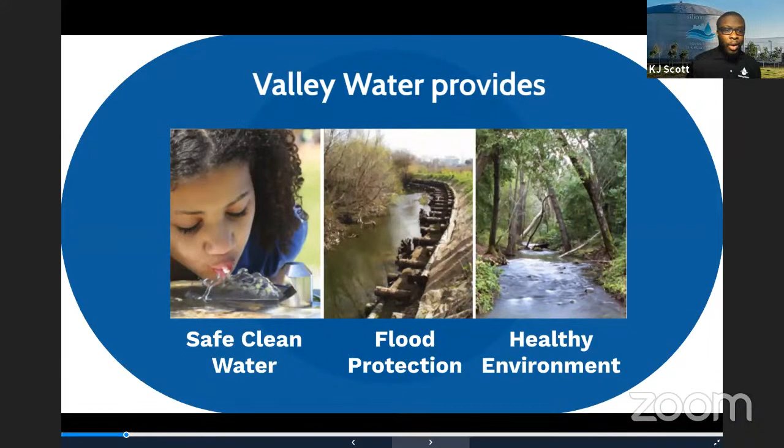So who do we serve? Valley Water is governed by a 7-member board of directors. We serve nearly 2 million residents in 15 cities, and we have about 4,700 direct well owners. The water district is a wholesale water provider.

What that means is the water you receive at your house indirectly comes from us. It comes from one of the retailers, of which there are 13 local water providers that we distribute water to. One of those retailers is responsible for the water coming through your pipes at home. These 13 local water providers use the groundwater basins along with other sources to deliver drinking water to homes and businesses within the county.

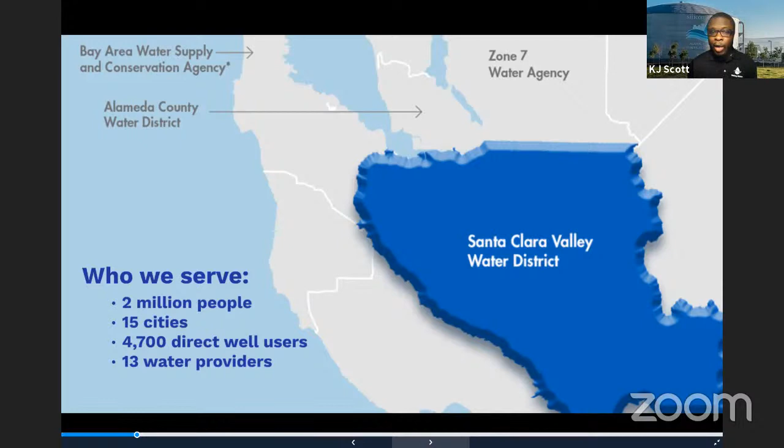Here is Santa Clara County's comprehensive water system map. In the South Bay, we have 10 reservoirs that we pull water from and 4 water treatment plants. If you want to learn about all of the water treatment plants and other things Valley Water has to offer, please take our water infrastructure tour series. We'll drop a link later in the presentation so you can learn more about the other 3 water treatment plants that we're not discussing today, which all deal with our drinking water system.

The fourth and final water treatment plant you'll learn about today is the Silicon Valley Advanced Water Purification Center, indicated there in purple. If you ever see that shade of purple on a pipe or sign anywhere in the community, know that recycled water is flowing through those pipes. You'll learn about that today, and I promise you'll start noticing more purple around your communities from now on.

On this map, the red lines represent imported water from the Hetch Hetchy Reservoir. The orange pipes represent imported water coming from state and federal water projects through the Delta Conveyance System. The green pipes represent water being treated and brought out to the retailers. I also like to mention there are 10 reservoirs from which we pull water.

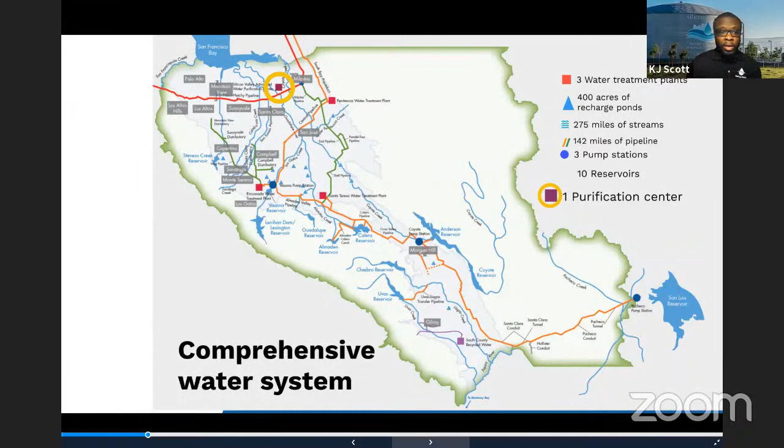All right, remember what I said earlier. You will not be the only ones asking the questions today. We're also going to ask questions. So speaking of which, we have our first poll question for you all.

The first question is, how much of our water supply do you think is local? Out of all of Santa Clara County's water supply, how much of it do you think comes from a local source or by local means?

Do not worry about having the wrong answer, this is all for educational purposes. We are here to learn, to take in, and hopefully by the end of this presentation you all will become water ambassadors, if you're not already, to help spread the word about not only recycled water, but also purified water and the plans that we have for purified water moving forward.

Okay, I see your answers coming. Oh, everybody, oh, not quite. I see some more people haven't answered yet. Got to turn in your quiz scores. What's going on? Blanca will give me the countdown soon. You don't want to turn in your homework late, there are repercussions for that.

And we're closing in 4, 3, 2, and 1. All right, Blanca is now going to go ahead and provide the answer for you all. Thank you, KJ.

So most of you said 30%, and that is actually correct. What you're seeing in front of you right now is the typical breakdown of our water supply in a typical normal year. As I mentioned before, we are in an extreme drought, so our current water portfolio is anything but typical.

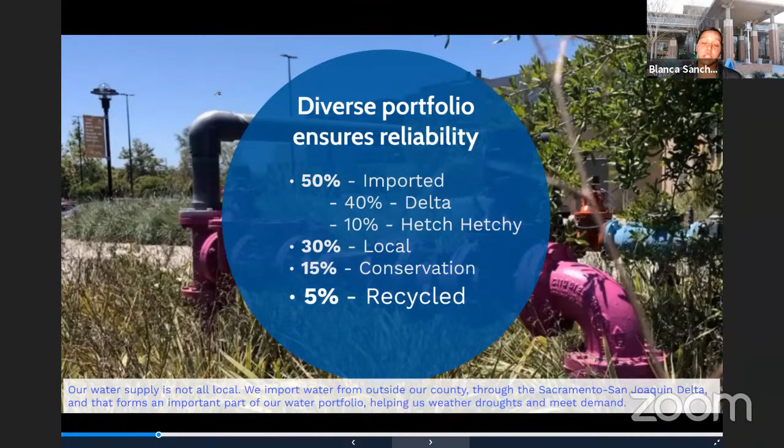Now, Valley Water has done a good job at building this diverse portfolio. For example, right now we're in a drought, and the imported sources are not as plentiful. We can shift and tap into different sources so we can continue to meet our needs. However, there are still a number of risks that we have to continue to face.

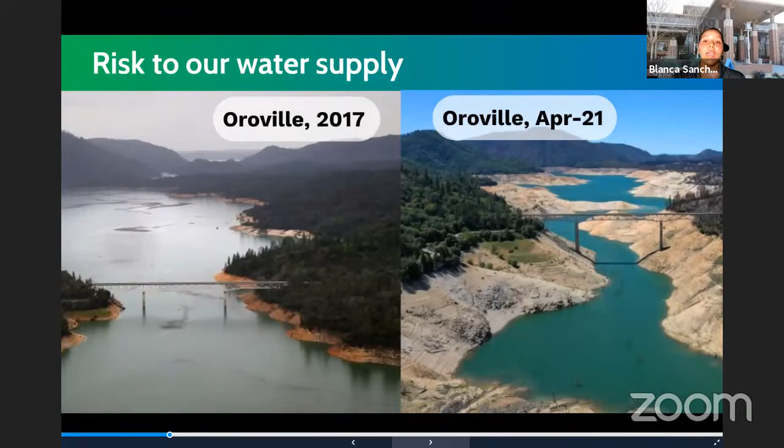One of them, and very real to us right now, is drought and climate change. This is one of those imported sources we were talking about - Lake Oroville, the largest reservoir in the state of California. It's an important water source, not just for us, but for the entire state. You can see here the water levels between 2017, which was a year we had a lot of rain, and April of this year.

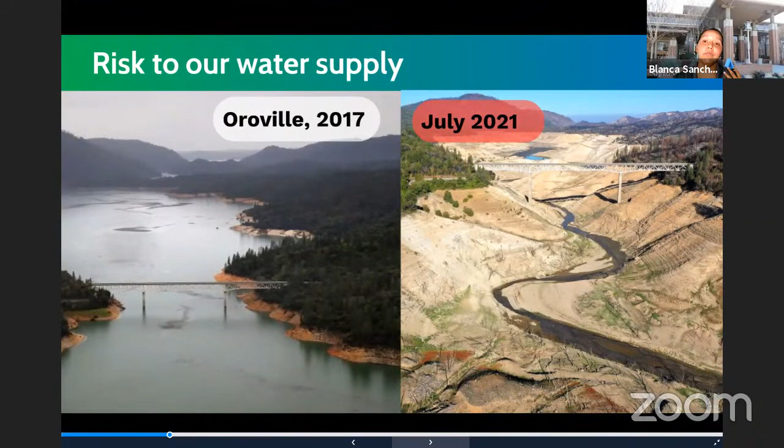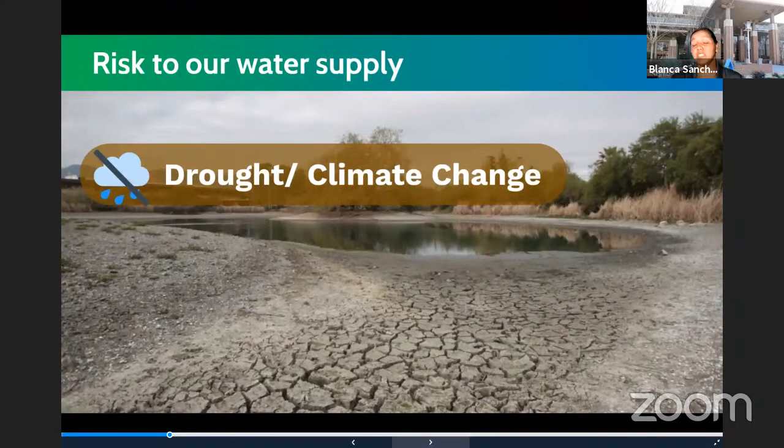Now we actually have an updated photo. This is what it looked like as of July 2021. You may have heard in the news that a lot of our state reservoirs are very, very depleted, reaching historic lows. Drought and climate change is very real. It's not going away. It's part of the California reality. We have to be better equipped and suited to make sure we can continue to meet the needs of our communities, even in times of drought. This can also have negative impacts on our water supply, but population growth is another thing we have to contend with.

Our water supply is not growing. As a matter of fact, it could be argued that it's actually decreasing because of climate change and drought and things along those lines. But our population is growing. So we have more people that need that water supply, and we're trying to meet their needs with what is, in essence, a finite supply.

And finally, the aging infrastructure. Most of our infrastructure that KJ was talking about, our reservoirs, most of them were built in the 30s and 50s. They need to be retrofitted to make sure they can continue to meet our growing water demand and the infrastructure needed to support that water system. So aging infrastructure is an ongoing challenge for Valley Water that needs to be contended with on a yearly basis, year round.

So in terms of what we're doing to keep our infrastructure up to date, one of the projects you may have heard about is the Anderson Seismic Retrofit Project. Anderson is actually the largest reservoir in the Valley Water system. The fact that it's down is significant, and the fact that it's down during the drought is even more significant, because we've had to empty out Anderson due to an order from the Federal Energy Regulatory Commission, asking us to empty it out because of concerns with the seismic stability of the dam itself.

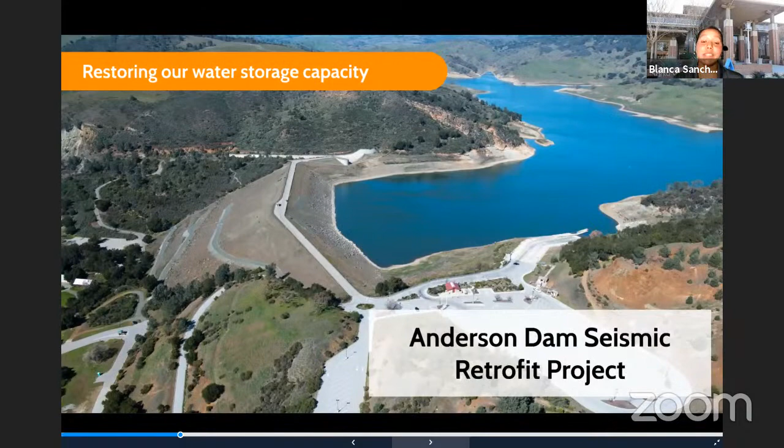So we are in the process of retrofitting, which will actually require completely tearing down the dam and rebuilding it to make sure it's seismically sound and that we can maximize the storage capacity of this reservoir, operating it while making sure we're not bringing undue risk to the community. But during a time of drought, that's about 50% of our surface storage capacity that is currently out of commission, which is a significant loss.

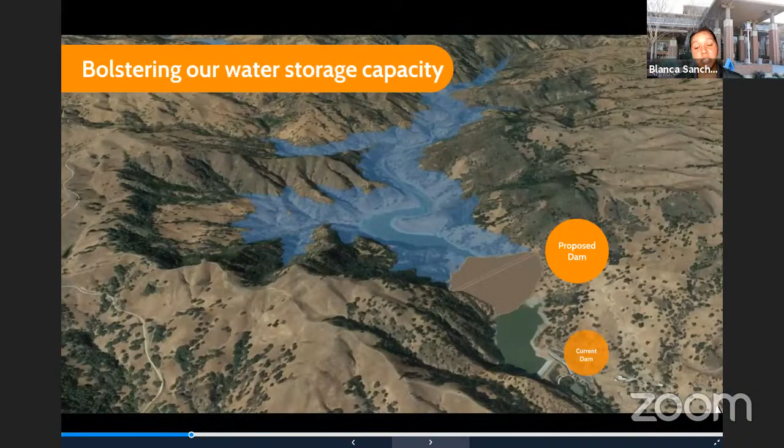The other thing we're exploring is actually increasing and bolstering that surface storage capacity. One of the projects Valley Water is currently considering is an expansion of the Pacheco Reservoir. Pacheco Reservoir is a relatively small reservoir on the boundary between San Benito and Santa Clara County. It currently only holds about 5,500 acre feet - that's the capacity, enough water for about 55,000 people for a year.

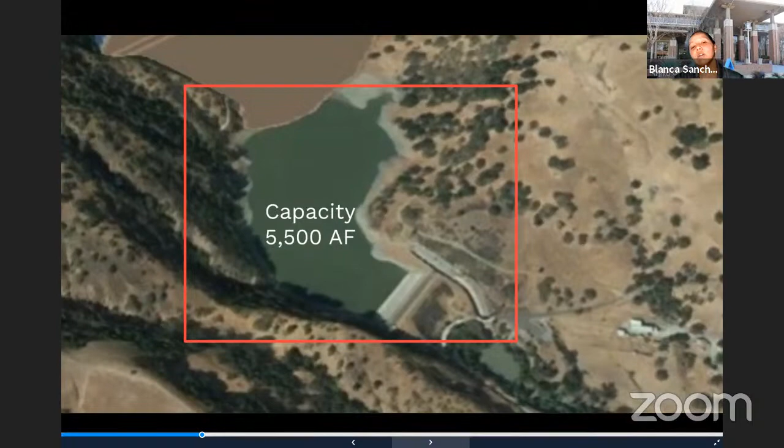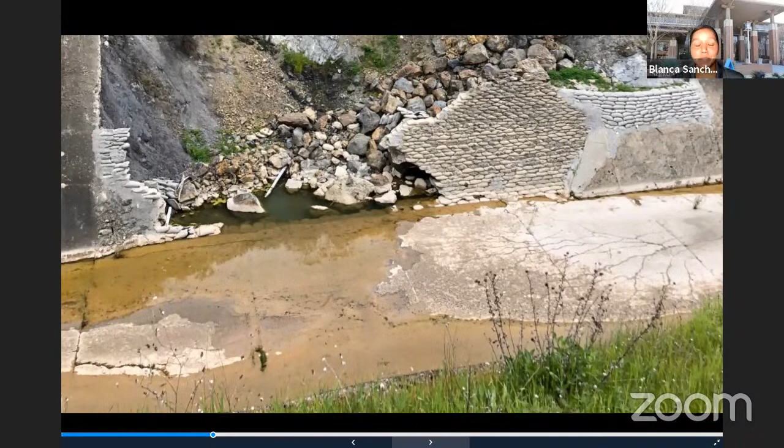The expansion project - the actual current reservoir is pretty in disrepair, definitely needs a lot of fixing and patching up, as you can see in this picture. The proposed project would actually build a brand new dam at the same location that would increase the capacity of this facility to 140,000 acre feet. That would be enough water to supply 1.4 million people for an entire year in the event of an emergency.

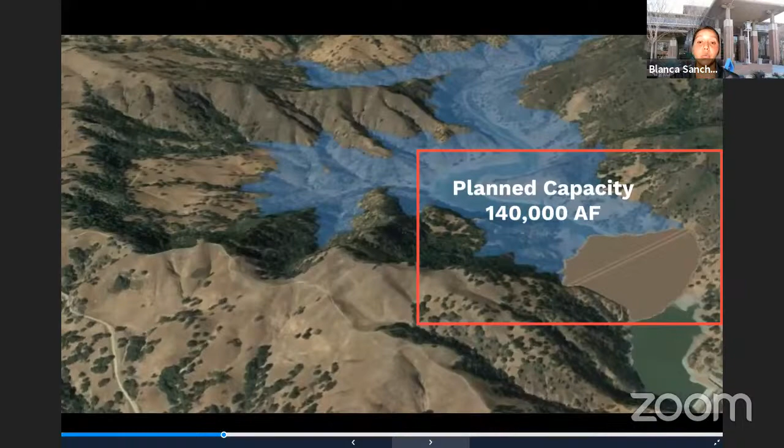In an emergency, we're talking about, for example, the current emergency we're facing right now in terms of drought, where that imported water is not available. If there were any disruptions to the conveyance system for that imported water during a typical year, this would be one way we could supplement the loss of another water supply through one that we have here locally and manage locally.

All right, so that gives you a quick overview of Valley Water, and now we're going to dive deeper into this water reuse and advanced water purification. So I'm going to pass it on to KJ as we head on over to the regional wastewater facility.

So let's talk a little bit about the Regional Wastewater Facility so you understand the significance for this presentation. The San Jose, Santa Clara Regional Wastewater Facility is the supplier of the water that goes to the Purification Center. This facility treats up to an average of 110 million gallons per day of wastewater.

Wastewater is any water going down the drain within your home - a sink, your bathtub, your washing machine, your dishwashing unit, your toilet, etc. So any drain within your home. As soon as it goes down the drain and into the pipes, it's going to the regional wastewater facility.

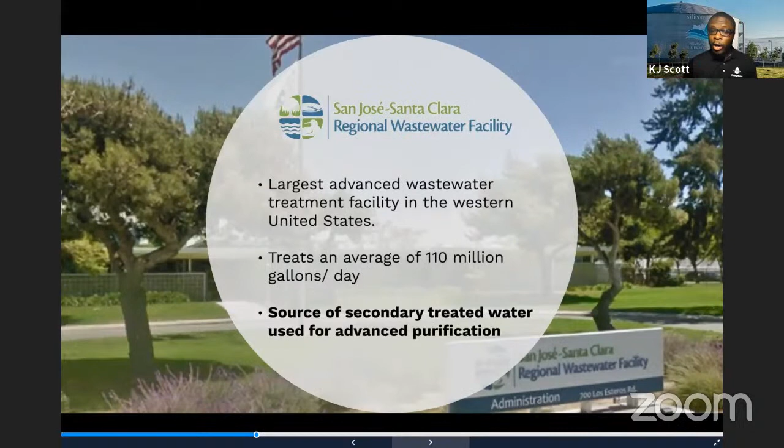So we are at this secondary treated water phase, and we have some graphs here to show you very soon. But before we do, I have to make sure you all are familiar with the water cycle, because the water cycle is essentially what the Purification Center can help speed up.

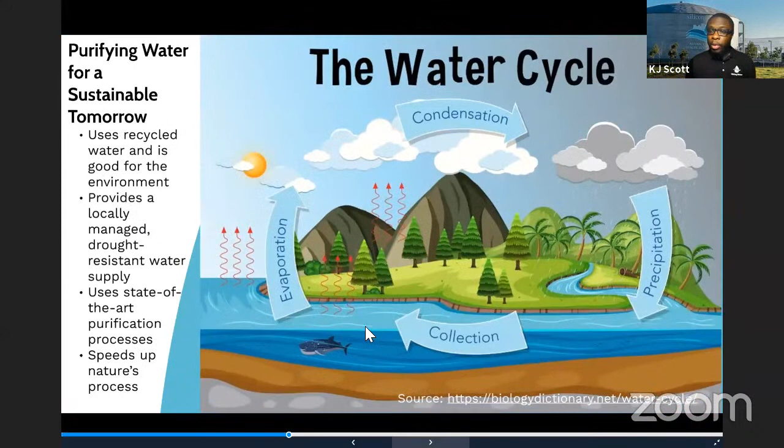The water cycle is a built-in, Earth-made system in which Earth naturally replenishes water on its own. So ocean water or whatever water is out and about can get evaporated, goes into the sky. We see it as clouds, it condenses, then eventually comes down as rain, precipitation, and it does it all over again. So all the water here on Earth has been used forever.

Now, the only issue with the water cycle, if there is an issue, is that sometimes this can take a long time. If you're a small water molecule at the very bottom of the ocean, there could be years, centuries before you're even evaporated again up into the sky. Well, we have so many residents in Santa Clara County, we may not have that time - we don't have decades and centuries before we can use that water again.

So if there's a way that we can turn over this wastewater that we create every day in a timely fashion, then we can create an essential system for ourselves in order to bolster our local water supply so that we do not have to rely on so much imported water, especially in a drought which we are currently in. The Purification Center is simply a model to speed up Earth's natural process of recycling water in purified form.

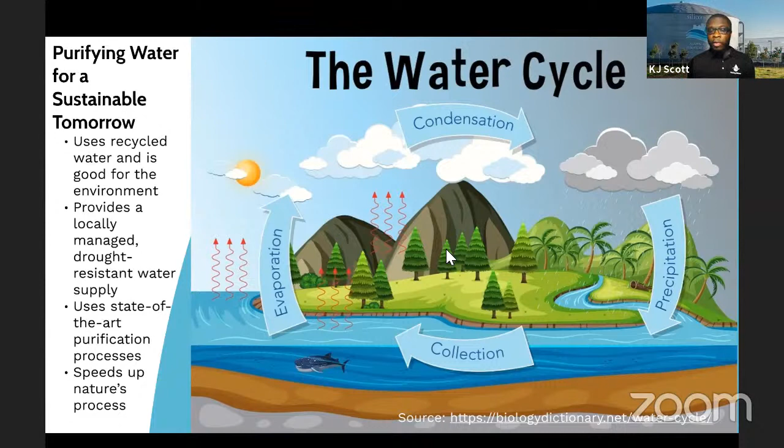So when the water leaves your home and goes to the regional wastewater facility, the facility will initially take out all of the large objects out of the water, all the suspended solids we can see with our naked eye, and remove those objects from the water. Once that water is now considered secondary treated water, a portion of this water is sent to the Purification Center for purification.

At that point, the Purification Center's job is to remove all of the dissolved solids out of the water that we cannot see. These are microscopic solids.

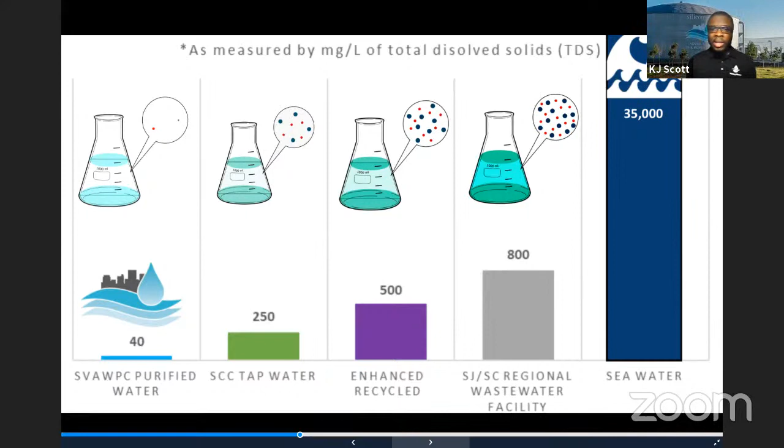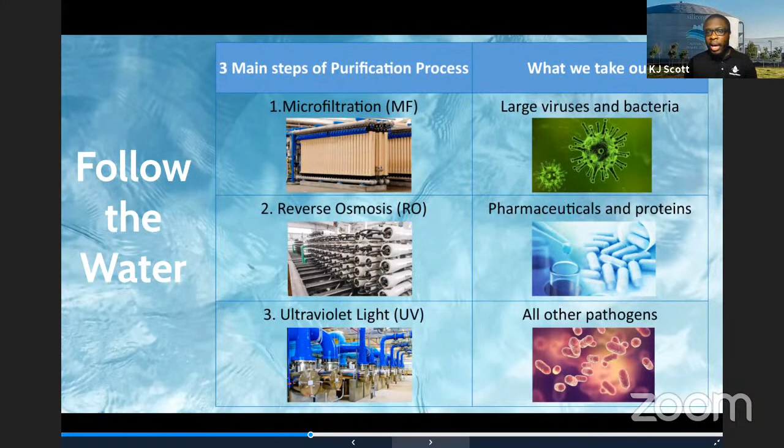Moving forward, these are our three main processes that the Purification Center uses: microfiltration, reverse osmosis, and ultraviolet light disinfection. On the right-hand side, you see the contaminants that are generally taken out at each one of these steps. We're going to talk about these in more length very shortly.

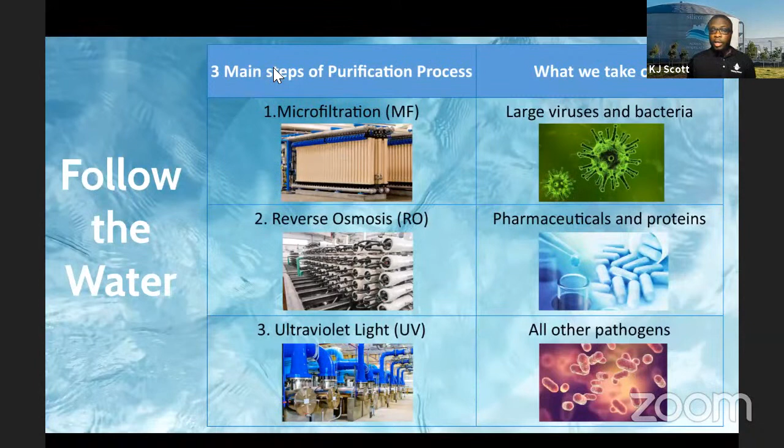So right now, what are we doing with this water? As I said earlier, we're just using this purified water to blend with our already recycled water system. By doing that, we are creating an enhanced recycled water solution at 500 TDS, used for industrial, landscaping, and agricultural purposes. So as you can see there, the water leaves your home.

It's either going to go to the Purification Center or remain at the regional wastewater facility. A portion of that will blend together and be sent off for recycled water purposes. In the future, we're going to talk about that later on at the end of the tour, what we want to do with this water once it leaves the Purification Center to help bolster our local water supply.

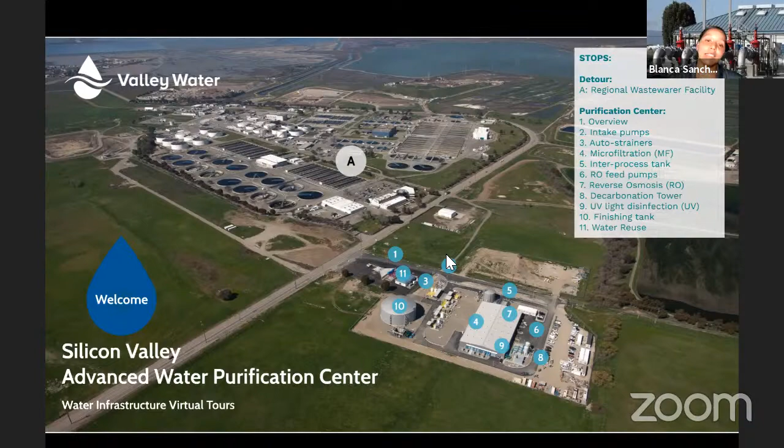We're going to start at station number 2, the intake pumps. The secondary treated water we receive undergoes about 10 hours of treatment before it comes to us. Before we subject this water to advanced purification, we pre-treat it at this facility. There are 3 things that need to happen before we can start advanced purification: the water needs to be pressurized, disinfected, and strained.

What you're seeing in front of you right now are our 4 intake pumps. Their sole job is to pressurize the water. The water comes to the facility and flows via gravity through about a quarter mile pipeline, so by the time it gets to us, there's no pressure, no energy in that water. These pumps help us increase the pressure of the water to 40 PSI, or 40 pounds per square inch. We're pressurizing the water so we can push it through the treatment processes.

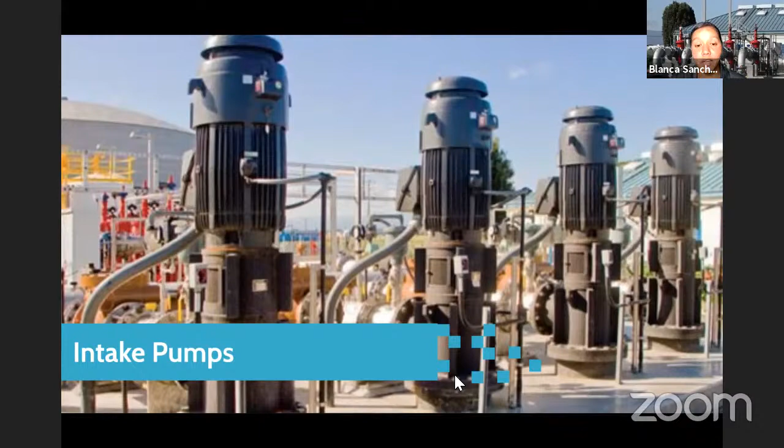After the water has been pressurized, as it makes its way to the next station, the auto strainers, we add disinfectants to the water. We do that to help control for any biogrowth in the water as it moves through the treatment processes. So after it's been pressurized, we've added chloramines to disinfect it.

Now it's time to strain it. The water we receive is about river quality water, so there are still some very, very small suspended solids in the water that you can kind of see with your naked eye. So the water looks a little bit murky.

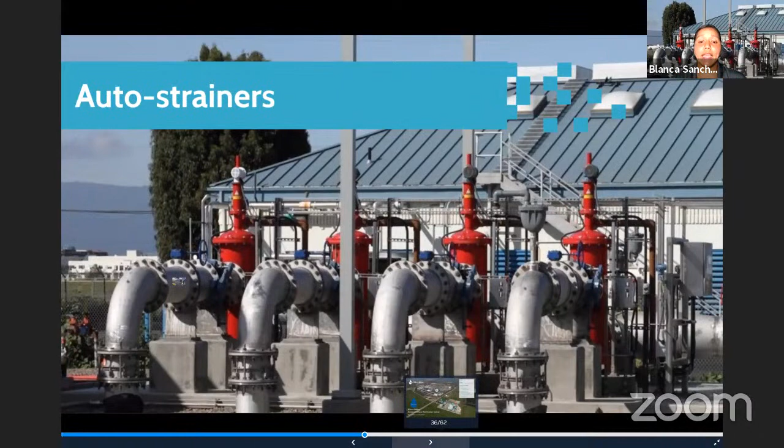The water passes through these 4 auto strainers. Inside each one is a stainless steel cylinder with openings about 300 microns in size. So any suspended solid in the water that is 300 microns or larger will get caught inside this strainer. For comparison, 300 microns is about the width of a human hair.

The auto strained water then flows out through the walls of the cylinder—it flows in through the middle and pushes outward. That water then moves on to advanced purification. All of the contaminants that get removed and stuck inside the cylinder are vacuumed out. There's a rotating nozzle inside the cylinder that rotates about every 30 to 40 minutes and suctions out all of those contaminants. Those contaminants are then sent back to the regional wastewater facility for reprocessing.

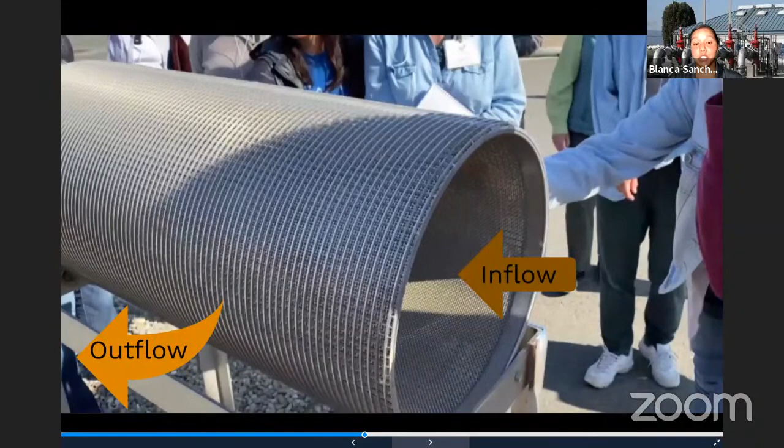The auto strained water then moves on and starts the advanced purification process with the first step. So once again, we started with pressure, disinfected, strained that water, and now we're going to move inside our facility to the first step, which is microfiltration.

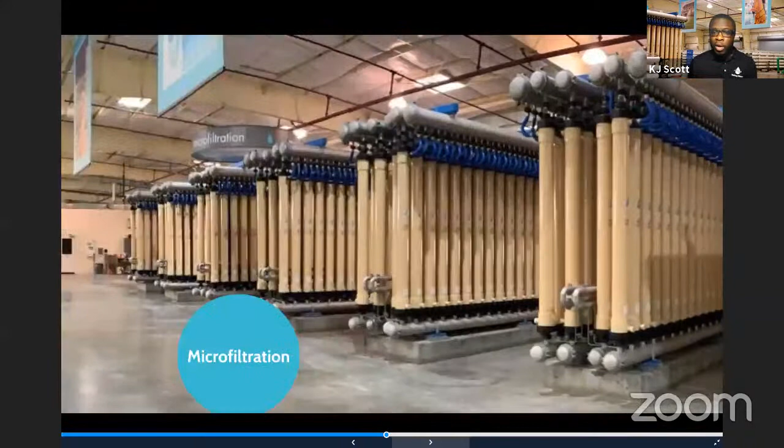All right, so here's an inside look of the facility. On the right-hand side, we have microfiltration, which we're going to talk about next. On the left-hand side is reverse osmosis. And in the very back, we have the ultraviolet light disinfection reactors.

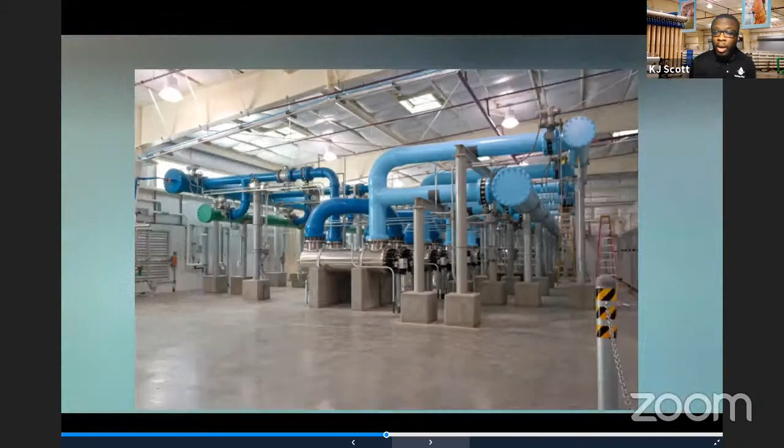All right, so the next thing we're going to do is play a short video for you all about microfiltration, and then we're going to talk about it. A link will be posted in the chat for those having trouble viewing. You can view it after the tour.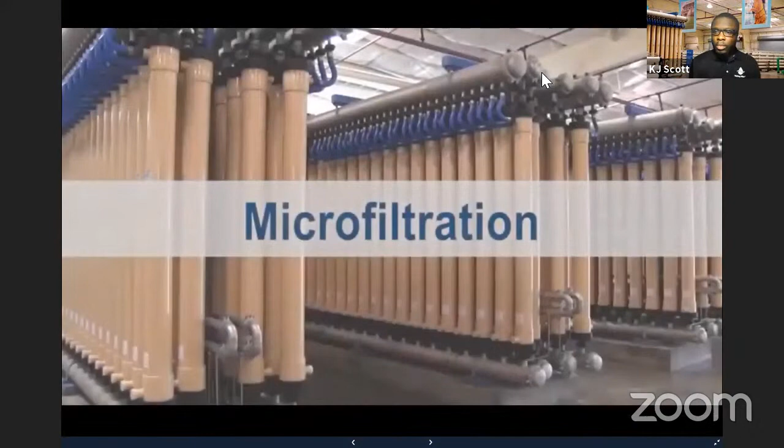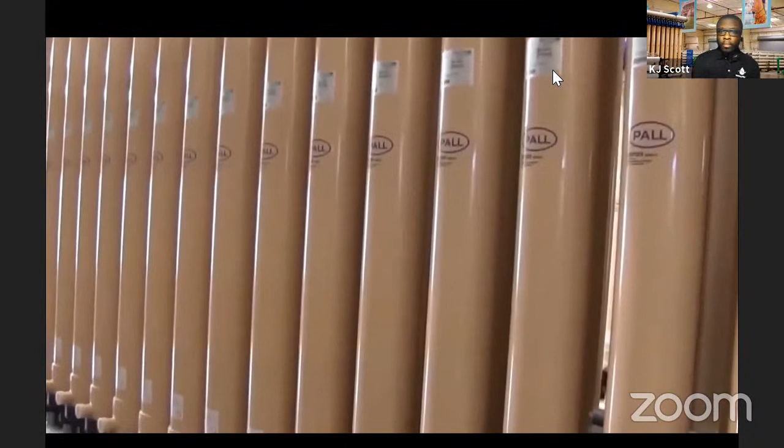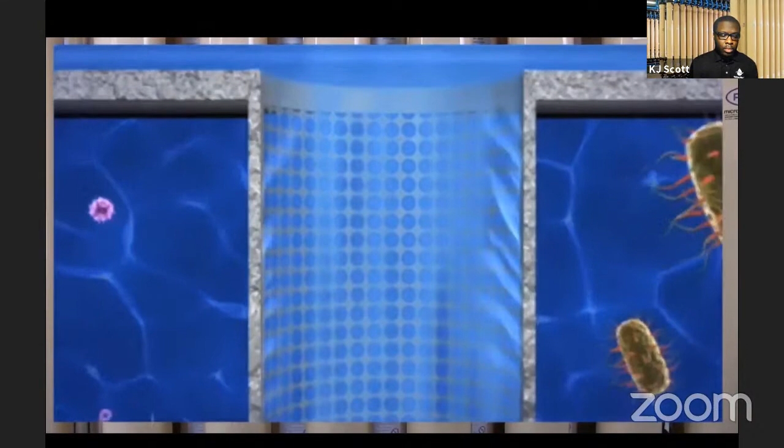During microfiltration, water is forced through racks of vessels, with each vessel containing thousands of hollow fibers. The outer wall of each fiber is made up of tiny pores, only 0.2 microns in size, or about 300 times smaller than the width of a human hair. The fibers filter out microscopic particles such as silt, protozoa cysts, bacteria, and even viruses.

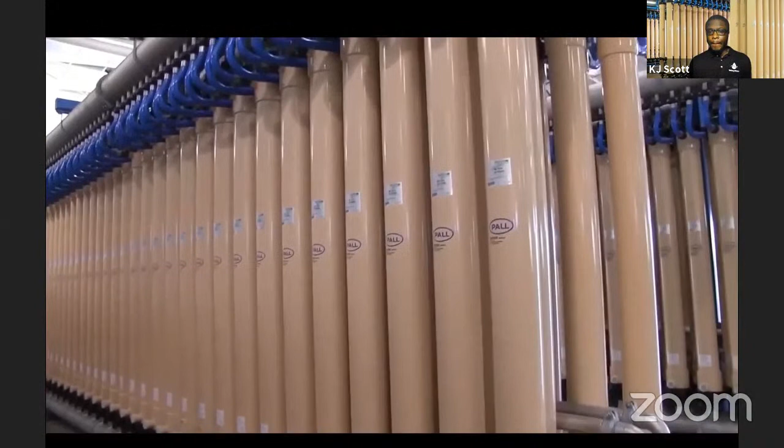Microfiltration vessels are backwashed periodically to remove any buildup of particles on the membrane walls. The backwash water is returned to the pretreatment tank for reprocessing. This helps the plant recover a higher amount of pure water.

All right, so microfiltration. Microfiltration is exactly what it sounds like, it's filtration on a microscopic level. We already removed all of the larger material out of the water, and now we're trying to get a little bit more specific, removing smaller material.

So what happens is, all of these vessels that you see in front of you, there are 896 of them at this facility, and water enters through the bottom of the vessel and shoots all the way to the top. Along the way, contaminants are removed from the water. Let's take a look at how this is done.

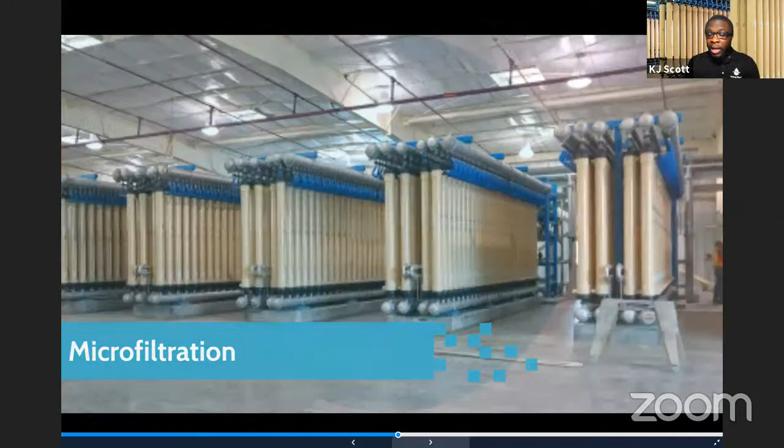So we have an image here of the inside look of each one of these vessels. This is an actual display that we have on campus for people to see and touch. In this time that we're in, we probably won't have anybody touching it, just for everybody being safe. But this is a display.

What happens is water enters from the bottom of the vessel and shoots all the way to the top. Now each one of these fibers, there are up to 6,000 of them, has small openings, tiny openings on the sides. You cannot see them, don't even try, okay? Small openings about 300 times smaller than the width of a human hair.

The water must enter these openings before it can actually enter the fiber itself. So the openings you do see on the top of these fibers are the inside of the fibers into which the water will squeeze. But the tiny pores I'm referring to, which the water must squeeze into, are on the sides of the fibers that you cannot see.

Once again, 300 times smaller than the width of a human hair, and pressure is used to squeeze the water through here. So a lot of large bacteria are removed from the water at this point. We measure this in micron size because we know the size of a water molecule, and we'll talk about that shortly. We also know the size of these bacteria, which tend to be very large. And that's the process there.

Microfiltration is backwashed every 30 minutes. All debris and contaminants are sent back to the regional wastewater facility for proper disposal.

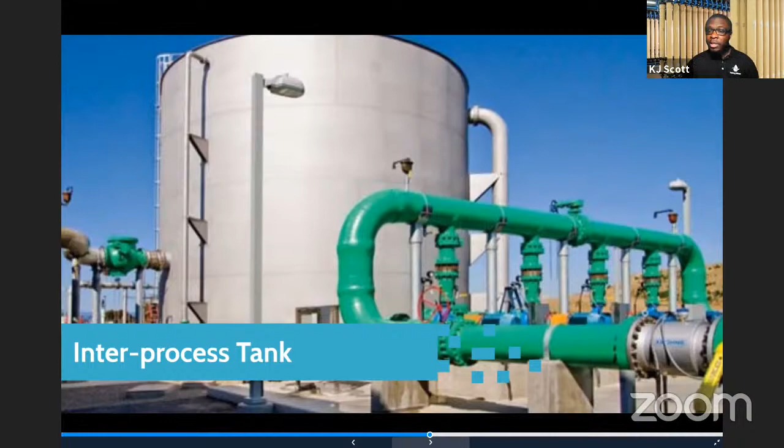And so now we're going to go to the back of the facility. We're still going to remain outside and go to our reverse osmosis feed pumps. There are 3 of these pumps. Now, unlike the pumps we talked about earlier, these pumps are pressurized anywhere between 130 and 140 PSI, pounds per square inch.

And the reason for that is because it's preparing the water for reverse osmosis, which removes even smaller material out of the water.

I talked about seawater earlier, and basically people say, hey, we have all this ocean water, why don't we use it for our water supply? Well, in some places in the world, people are doing this, and depending where you're geographically located, you may receive less imported water or less rainfall, so you're a little bit forced to go with using ocean water and desalinating it.

Desalination is the removal of salt content out of ocean water. The only issue with desalination is that it requires a lot of energy. For example, these same pumps that you see here, pressurized anywhere between 130 and 140 PSI, will need to be pressurized anywhere between 1,000 and 1,500 PSI in order to safely and securely remove the salt content out of that water.

More energy requires more electricity, which requires more money. So desalination right now is not the most efficient process to purify water at the moment. But as technology advances, hopefully one day we'll get to that point. We just wanted to point that out at this section of the tour.

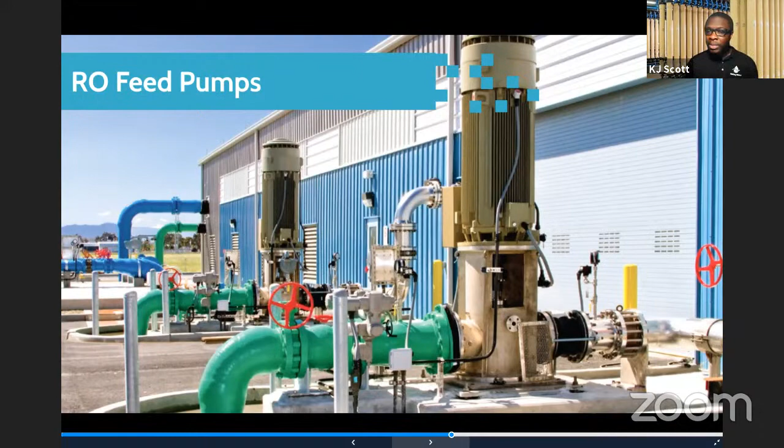Once the water is pressurized, it's ready to move back inside the facility for what's called reverse osmosis. We have a video here for you to view on reverse osmosis, and we'll recap a little bit about it afterward. A link will be posted in the chat for those who missed any material.

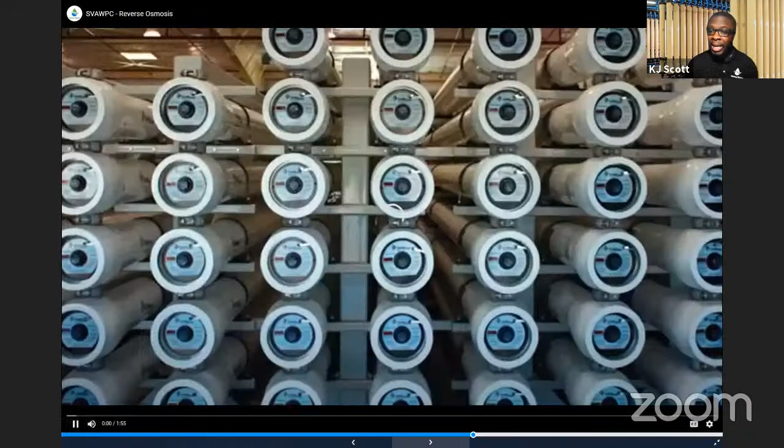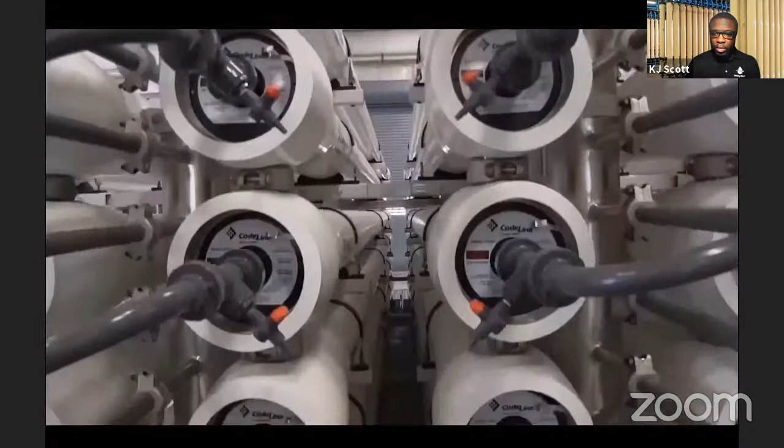Reverse osmosis works by forcing water through a special plastic membrane sheet to remove compounds such as salt, organic compounds, microorganisms, and viruses. Rolls of membrane sheets are wound into cylinder-shaped elements.

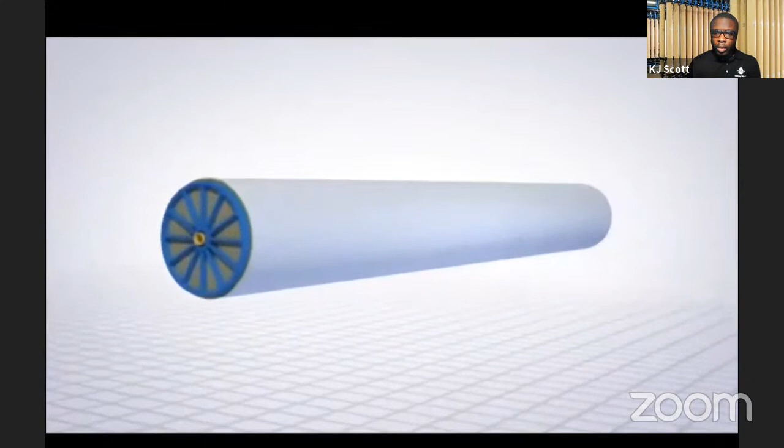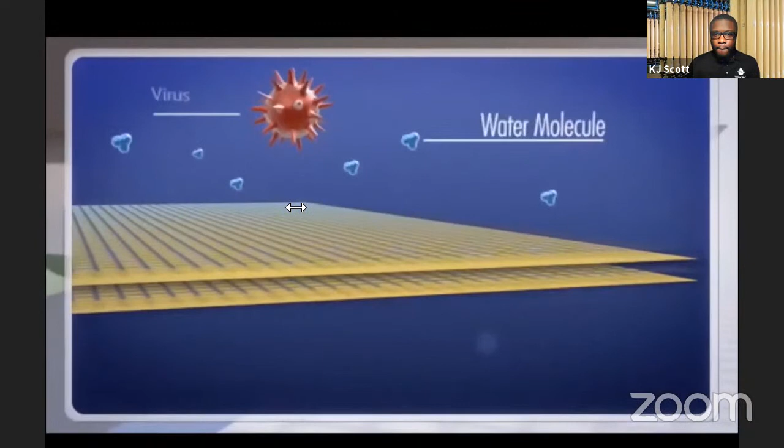There are several elements inside each long pressure vessel. As water enters the vessel, it flows over the membrane surface as it moves from one end to the other. The membrane layer is extremely thin. It allows water to pass through, or permeate, while preventing other compounds from passing through. Membranes remove molecules based on their size, shape, and charge.

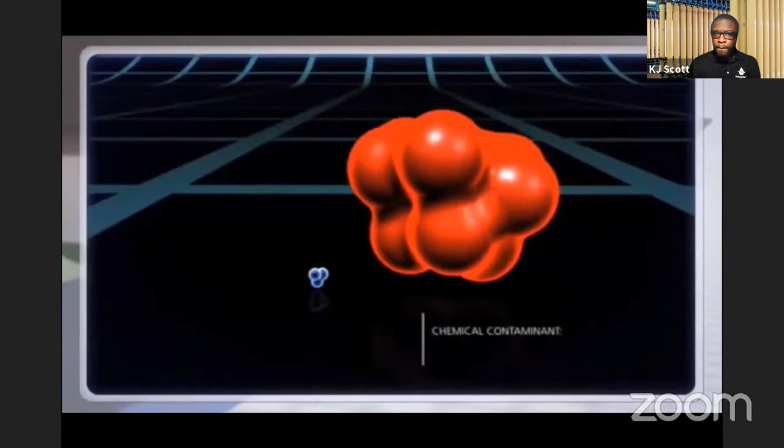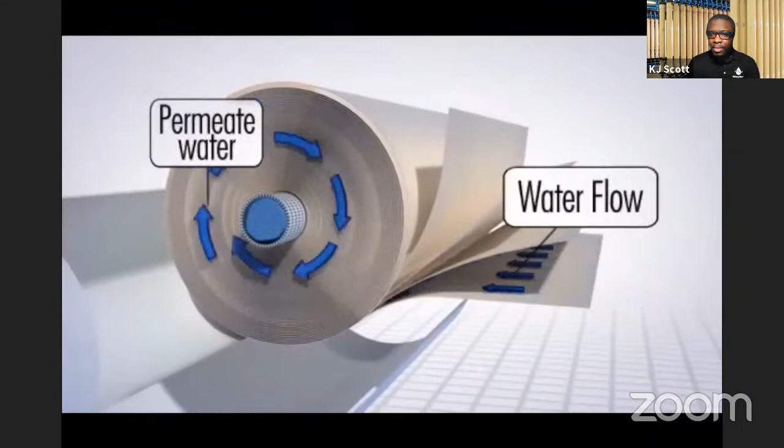Generally, contaminants larger than water molecules will not pass through, including most chemical contaminants and all microorganisms, such as virus and bacteria. Two streams of water are produced. Pure, clean water, called permeate, flows across the membrane sheets and passes through the membrane layers to the inside core tube. Water that does not permeate through the membrane becomes more highly concentrated in salt and other substances. This water is called concentrate.

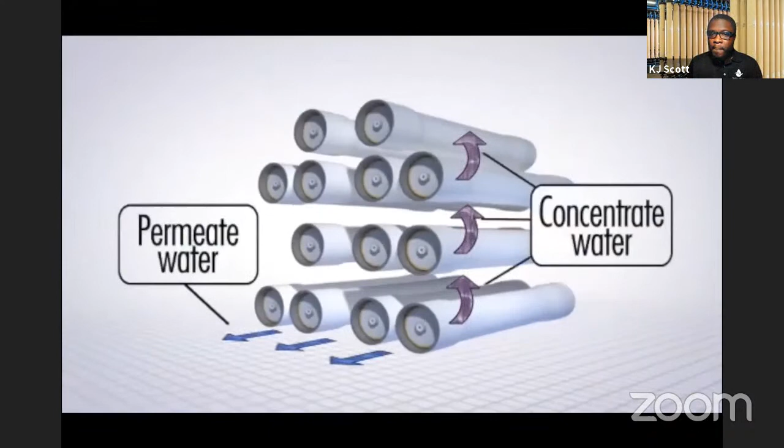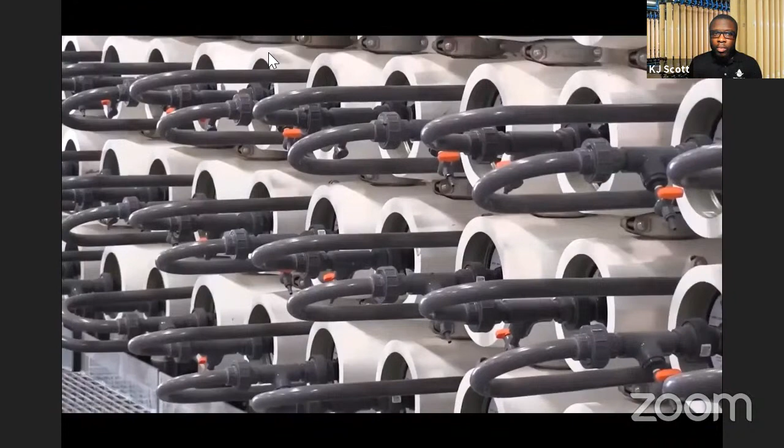The pure permeate water flows out the tube at one end of the pressure vessel, and the concentrate water flows out another outlet. The concentrate water can then flow into other pressure vessels for the same process to happen again, so even more pure permeate water can be recovered. About 82% of all the source water becomes purified water.

The main thing I want you all to remember about reverse osmosis is that it removes anything larger than a water molecule out of the water. Water molecules are very small on a microscopic level. We measure this in micron size.

About 82% of the water that flows through these reverse osmosis cartridges is recaptured, and we call that permeate. The other 18% that does not make it through is called concentrate. Concentrate can consist of salts, viruses, organic matter, pharmaceuticals, chemicals, and even pesticides in this water. We have a water quality lab that tests for all these things. You can learn more about the water quality lab in our water infrastructure tour series.

Just to give you an idea, on a microscopic level, bacteria and even viruses, the large ones, are rather large. To give you an idea, a large bacteria or virus trying to pass through reverse osmosis would be similar to trying to squeeze a skyscraper through a marble-sized hole. As you know, that is impossible.

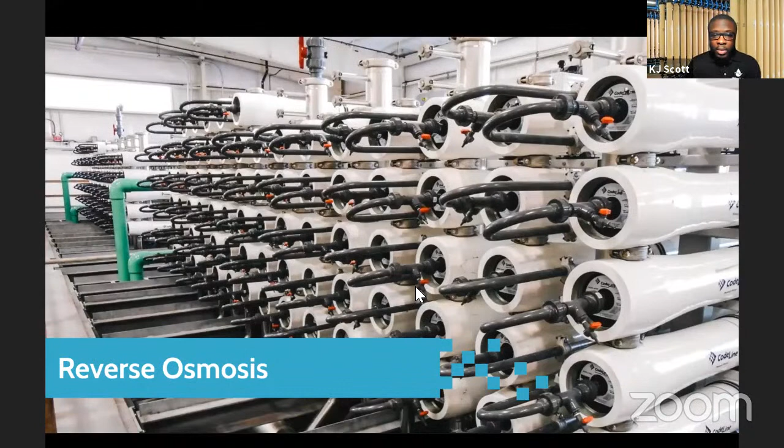Apologies, I was having a fight with my mute button. You'd think after 18 months we would have figured it out, but still struggling here.

All right, so we are about to wrap up our tour. After the water has gone through the reverse osmosis process, it's basically already at 40 TDS. So we've basically been able to remove everything that we are going to be able to remove through advanced purification. But we want to do just one more thing to make sure that the water is absolutely safe and high quality. So before we send it to the last step of the advanced purification process, the water goes back outside of the facility to these decarbonation towers.

What we are doing here is we're actually wanting to remove the CO2, the dissolved CO2 that's in the water. And the way that we do it is that we actually cascade the water over thousands of diffuser balls like the ones that you're seeing here. And the reason we want to do that is we want to remove that CO2, which is one of the things that actually manages to get through the reverse osmosis.

This is similar to basically like a soda or like a sparkling water. So what we're trying to do is basically shake the water so that the carbon dioxide can actually be bubbled up and released through the release valve at the top of these towers. The CO2 emissions are so minimal that they're completely allowed, and we don't even need to have any kind of special permit or licensing in order to be able to do that.

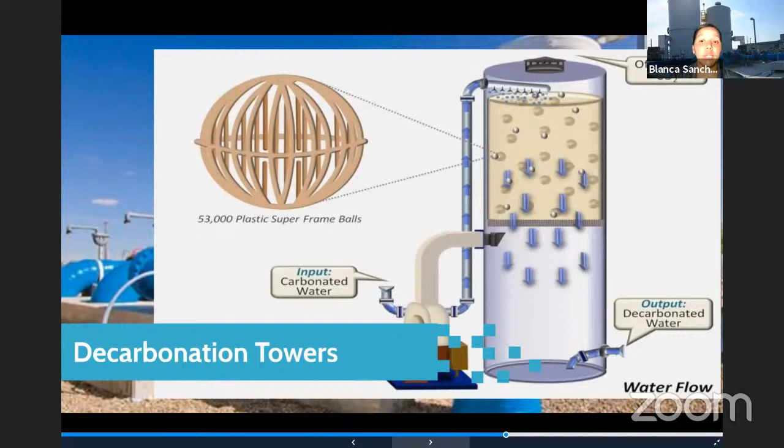Now, why would we want to do this? The primary reason is that carbonated water is actually highly acidic. And so by removing the CO2, we're able to increase the pH, which means we're decreasing its acidity, and prevent it from being too corrosive or damaging to downstream infrastructure because of the acidity of the water if we were to leave it in its acidic state.

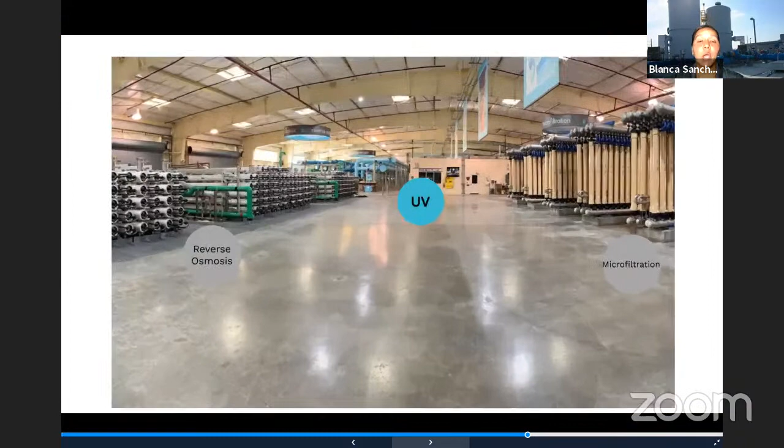Once we remove the CO2, then the water will go back inside of the facility for the last treatment process, which is UV light disinfection. So once again, we have a quick video for you, and then we'll chat about it.

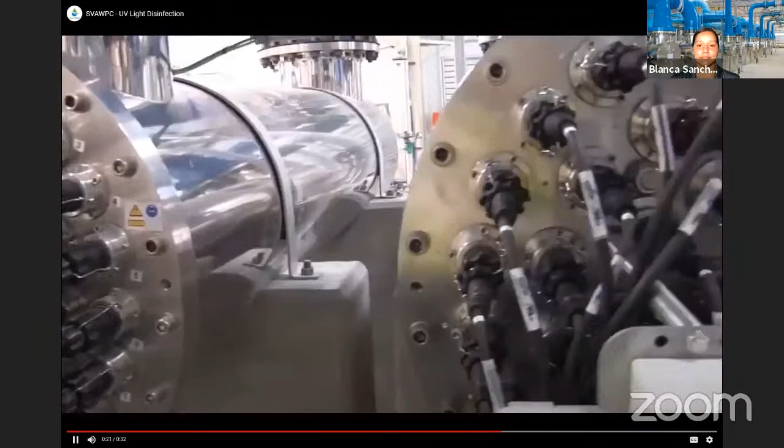The next stage is ultraviolet light. The water is exposed to strong UV light. This process removes any trace organic molecules. The process is similar to the one used in medicine and dentistry to sterilize equipment.

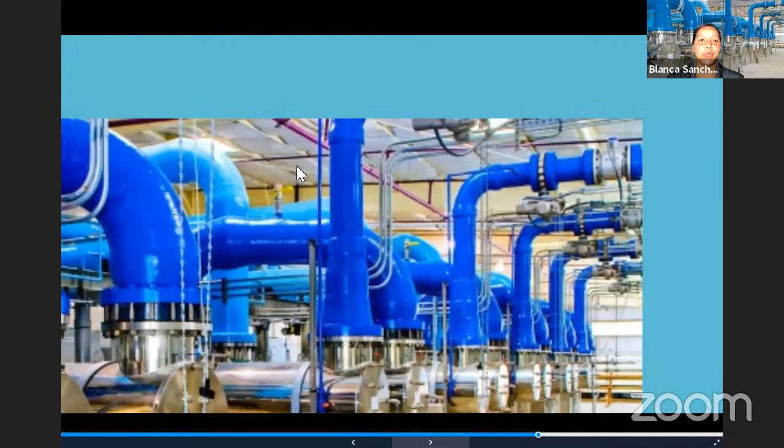UV light disinfection. So we have a total of 6 trains, each of them made up by 2 UV light reactors. Inside of each of these reactors, there's a total of 40 high intensity UV lights. Now, this is a safety precaution. What we're doing here is exposing water to high intensity UV light as a way of deactivating any pathogens that might have actually gotten through the system.

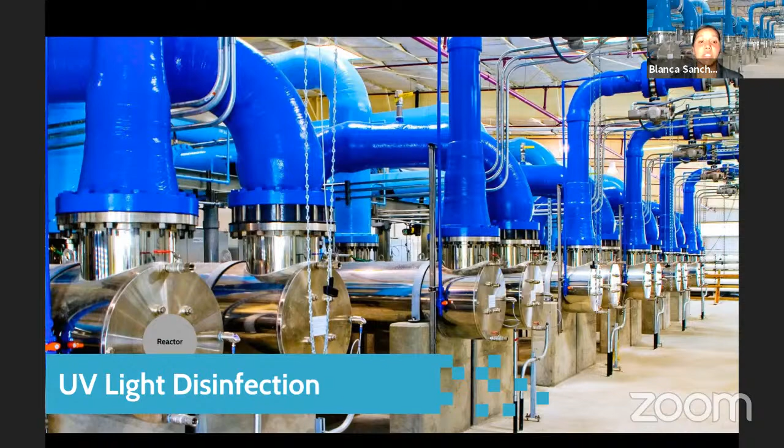So we're talking about disrupting the DNA of any pathogen so that they're not able to multiply and reproduce, and also breaking the bonds of any chemical compounds that might be in the water after we finish with the reverse osmosis. So as I mentioned, inside of each of these reactors, we have these 40 high intensity UV light bulbs, and the water really only needs about 30 seconds of exposure.

Now, currently we don't have the permits in place to be able to actually drink this water. And the reason for that is that we have to add one more step to the advanced purification treatment process, and that is called advanced oxidation.

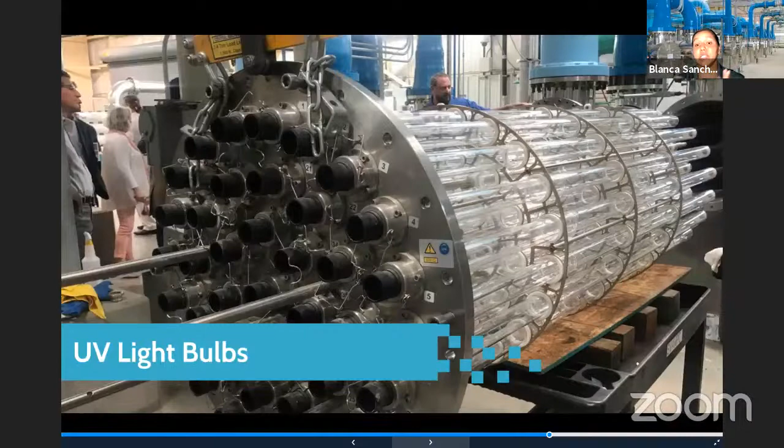The plant is currently in the process of adding advanced oxidation. What this will do is add trace amounts of hydrogen peroxide to the water to reinforce the disinfection. Once that is in place, then this water meets all the requirements by the state of California for it to be used for potable or drinking purposes. We are expecting that the advanced oxidation system will be online in about a year or so.

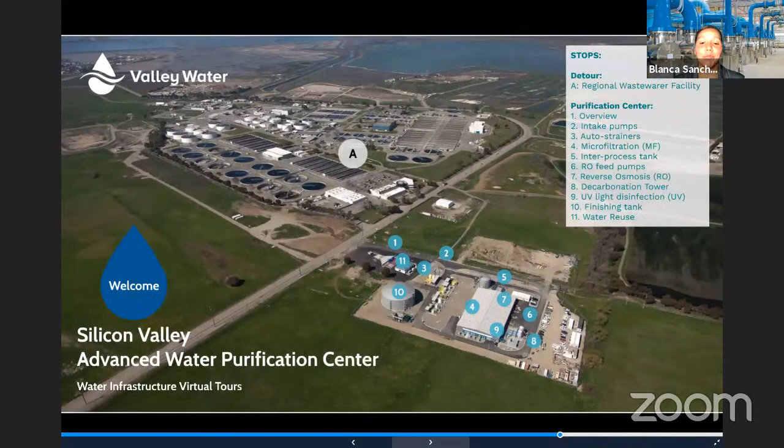Now that we produce up to 8 million gallons of advanced purified water a day, it goes to the last stop in our facility, the finishing tank. This is a 2.25 million gallon tank, just a holding space for the water while it waits to go on to the South Bay water recycling for blending with tertiary water for the purple pipe system.

There are currently about 800 clients that use the advanced purified water, among them places like Levi's Stadium, San Jose State University, and the Apple campus. They're using it for landscape irrigation, to flush toilets, and for cooling systems. The reason that's important is that we're not using drinking water for those purposes.

The other role this tank serves is related to something we haven't mentioned yet: this is a fully automated facility. That means we're only producing water on demand. If there's no need for the water, the facility automatically shuts down. So basically, when this tank is full, because we're not using the water, the facility will shut down completely. As we start using the water and the level goes down, once it reaches a certain threshold, everything will automatically turn on and restart production of advanced purified water. This is just another way for us to build efficiency into the system.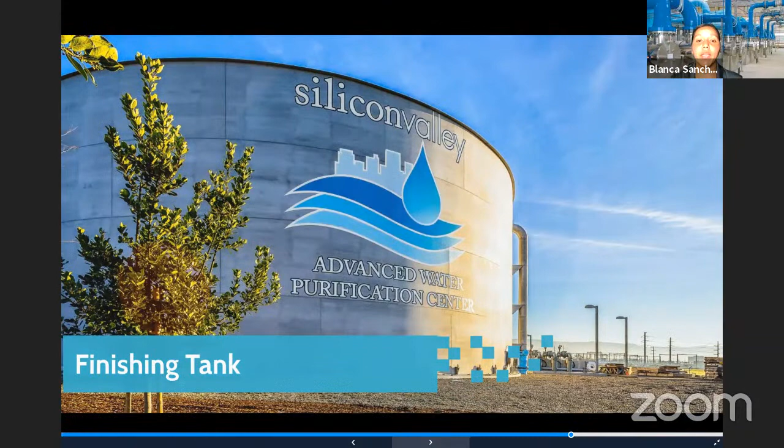All right, so that pretty much wraps up our walking tour of the Purification Center. Just as a quick reminder, this is a demo and research facility, but its purpose is to help us explore and plan for what eventually will be potable reuse, meaning using the water for drinking purposes.

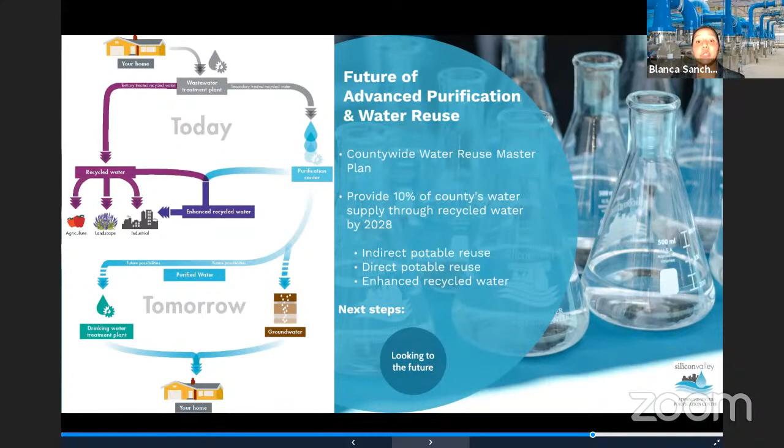Valley Water is part of the county-wide water reuse master plan, which seeks to provide up to 10% of the county's water supply through recycled water. What does this mean? It means increasing enhanced and recycled water uses, but also, once again, moving into potable reuse, either directly or indirectly.

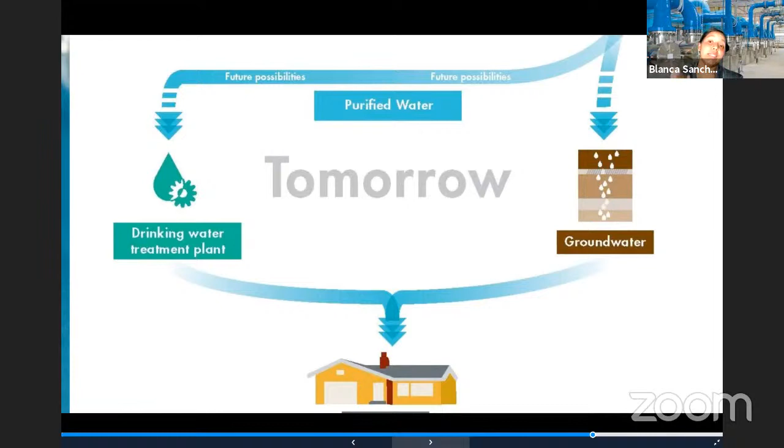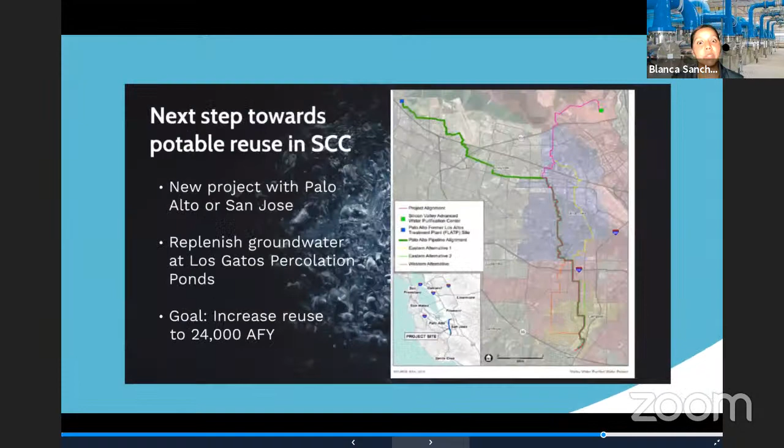What we mean by indirectly is that we use our groundwater basins as a holding and storage space before we actually use the water for drinking purposes. Directly means that the advanced purified water will be put directly into our water supply or our water supply distribution system. Now, in terms of our next steps towards potable reuse, Valley Water is currently in conversations to offer a new facility that would provide an additional 10 million gallons of advanced purified water per day.

We are in conversations with both the city of Palo Alto and the city of San Jose. It'll be at one of those two sites; we're not sure yet where. The map you're seeing here shows potential facility locations, whether in Palo Alto or San Jose. The San Jose facility would actually be adjacent to the current Advanced Water Purification Center.

The difference is that with this new facility, we're also looking to build the conveying system, meaning the pipeline that will take the advanced purified water from the treatment facility down to the Los Gatos percolation ponds. That's because this is the site that has been chosen as the location through which we would use this advanced purified water to help replenish our groundwater aquifers.

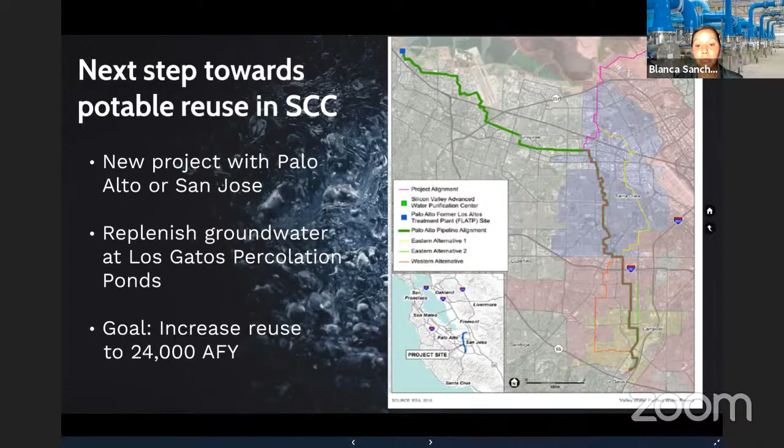We're able to use the Earth's natural filtration system to remineralize that advanced purified water as it makes its way down to our groundwater basin, where it would blend with the existing water before being extracted for drinking purposes. The longer-term goal is to actually increase our water reuse to 24,000 acre-feet. If you remember our conversion, that's enough water for about 240,000 people for up to a year, so it's a significant increase to our water reuse in the county.